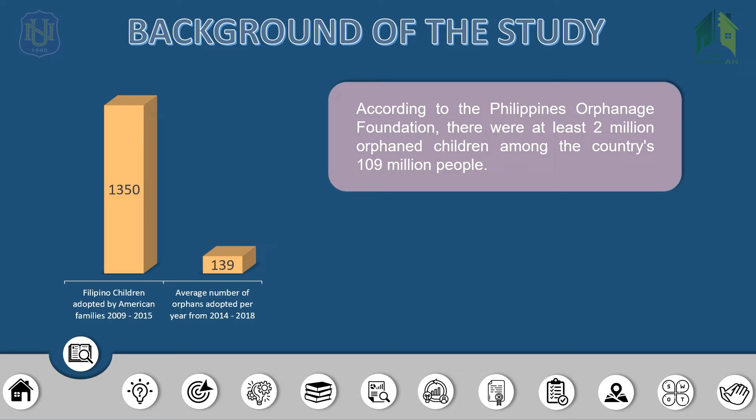To understand the orphan crisis in the Philippines, the Philippine Orphanage Foundation made 4 reasons that may be contributing to the Philippine ever-increasing orphan population. First is natural disaster. Second is teen pregnancy. Third is poverty. Fourth, lack of education, which bring us to the final factor contributing to the Philippine orphan crisis.

The Philippine Orphanage Foundation, together with DSWD, is the proponent of the project. They have allocated a budget of 2 billion and identified the site to be in Pasong Tamo, Quezon City.

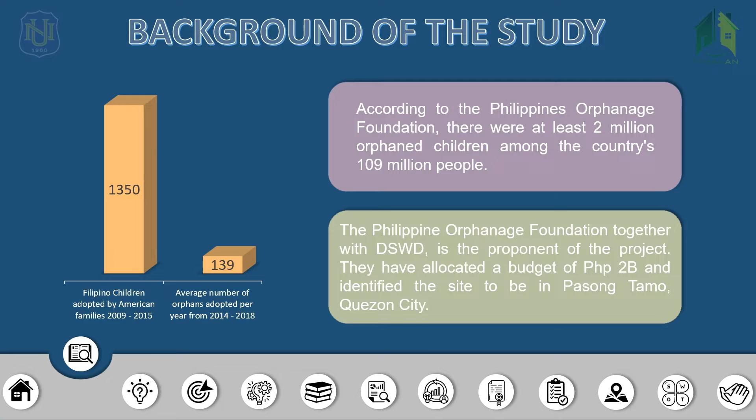Statement of the problem. The enormous rise of orphan and abandoned children is an endless crisis. They are anywhere, left broken and ignored in many places throughout the world. A lot of them will be raised without understanding the true meaning of love. They live without experiencing the embrace, leadership, and guidance of parents. They are not given the opportunity or rights to higher education, nor are they guaranteed a well-established career.

Most of them remain unwanted. The proposed orphanage is called Tahanan, which has a double meaning. Tahan means stop crying, and Tahanan means home. To put it into a sentence, it means stop crying now because you are finally home.

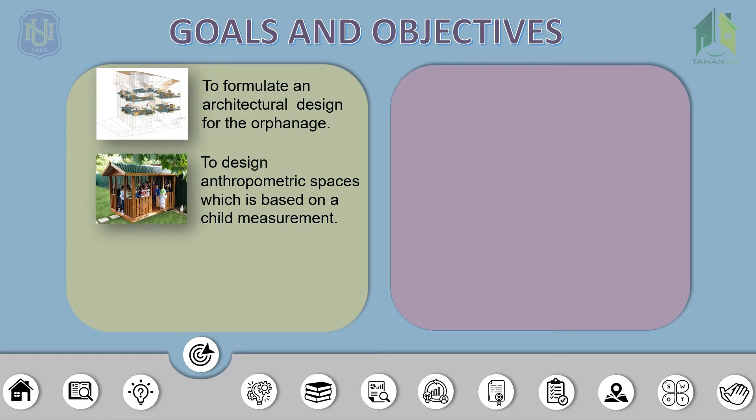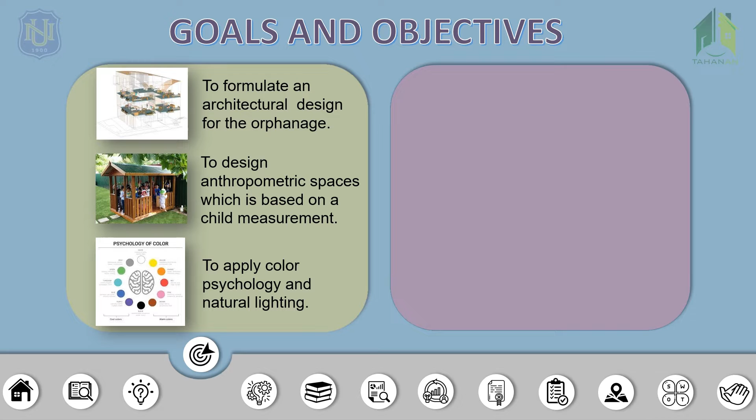Goals and objectives: To formulate an architectural design for the orphanage that can accommodate the material and psychological needs of an orphan child. To design anthropometric spaces, which is based on a child's measurement. A design that stimulates their senses and promotes their interaction with people and with the built environment.

To apply color psychology, like bright colors which radiate happiness and possibility, and using natural lighting that greatly influences the human body, both visual and non-visual.

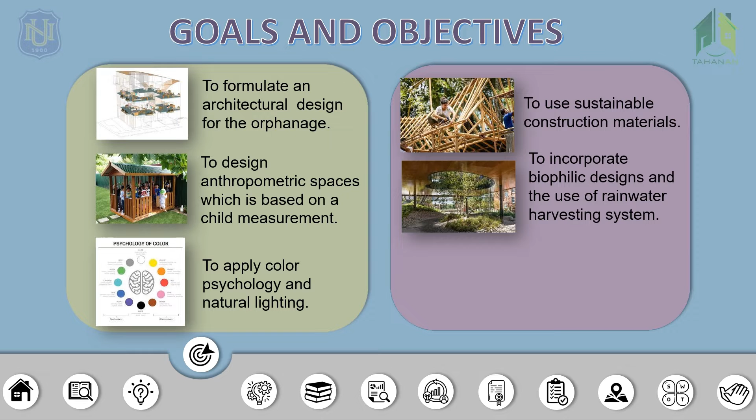To use sustainable construction materials, such as bamboo, which is a good alternative for an affordable home material, and cement eco bricks, which are built from shredded plastic garbage and wet cement, making them stronger.

To incorporate biophilic design in the built environment and the use of a rainwater harvesting system, as this approach is cost-effective, a substantial sum of money may be saved each year.

To evaluate the wind direction around and inside the houses for the optimum utilization of prevailing wind for natural ventilation.

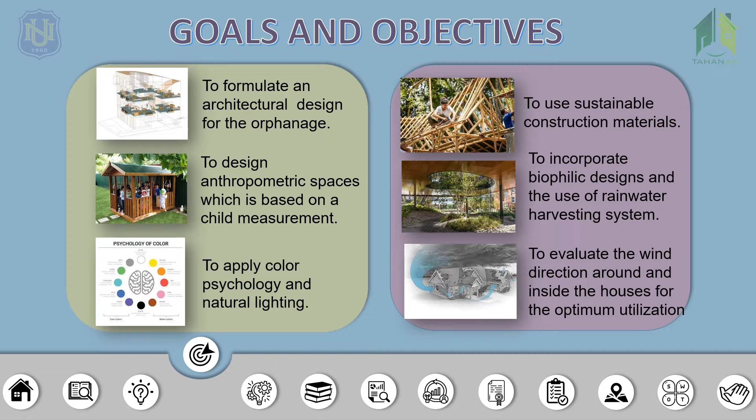Orphans come from different backgrounds, and changing environments tend to be very challenging for them to adjust to. We must take into consideration the perspective of a child and incorporate how materials and surfaces can influence their mindset, inspire feelings, and modify their way of behaving. The material utilization inside the space ought to eliminate any feeling of dread a child might be feeling after entering, and deliver an atmosphere of amicability through architecture.

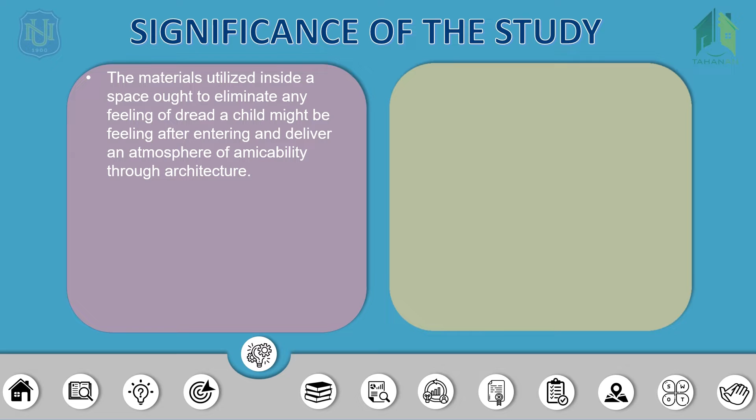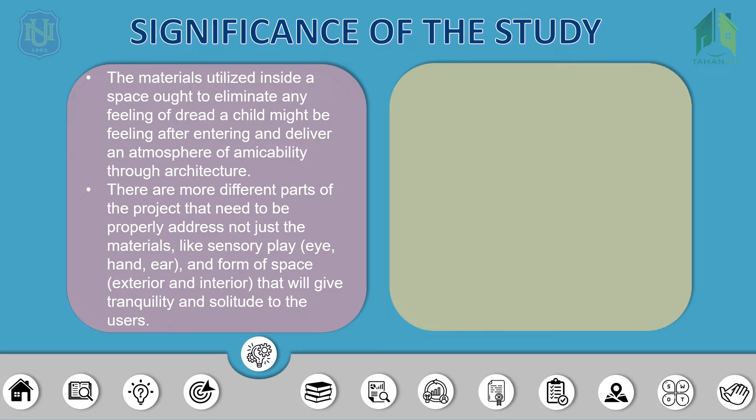The primary materials to be used are bamboo, laminated wood, and eco bricks. There are more different parts of the project that need to be properly addressed, not just the materials, like sensory play and form of space, that will give tranquility and solitude to the user.

While the arrangement of open air is fundamental, the design of a home in which a child stays should allow for a surrounding that will permit positive mental excitement. The mix of play spaces inside the home for cooperation and non-stop spaces for social communication are factors that were painstakingly thought of and executed into the plan.

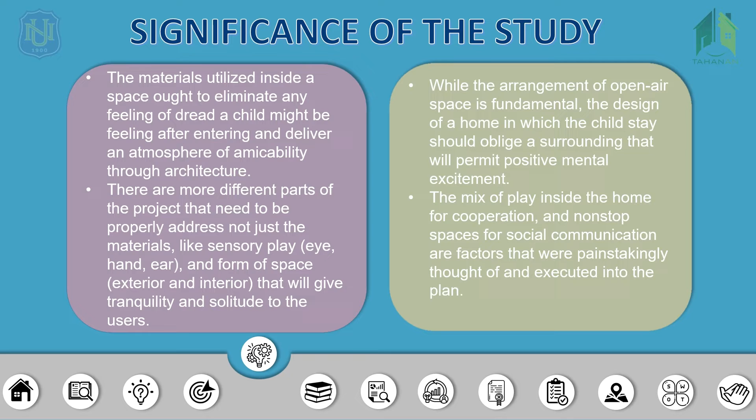Review of related literature. Article 1: Architecture Enabling Transformation of Lives in Children's Homes. This paper looked at how child-friendly design of the orphanage and its direct environment can support a smooth course of changing places and assist with incorporating these children into a new home by wiping out the sensation of estrangement.

Findings and application: Spaces that are too large can lead to noise and confusion, while spaces that are too small can create a heightened level of stress and anxiety. Incorporate cubbies and comfortable corners in our design.

Article 2: Designing Stimulating Environments to Alleviate Orphan Children's Psychological Problems. This study investigated how architectural design might help orphan children deal with psychological issues such as social isolation, despair, and fear because of losing their parents and adjusting to a new environment away from home.

Findings and application: Stimulating environment, engaging the body, encouraging playful sensory exploration, and offering a seamless relationship with the site's natural environment. Create interactive spaces within the site to activate their senses, brain, and emotion.

Article 3: Comprehensive Guide on Color Psychology for Kids.

In this article, the writer explained that to understand the basic principle of color psychology, you need to be knowledgeable on how color can affect the brain development of children. Findings and application: colors affect mood, emotion, action, and overall ambience of space. Apply bright colors in the interior for kids and pastel or matte colors for teens as these colors radiate happiness

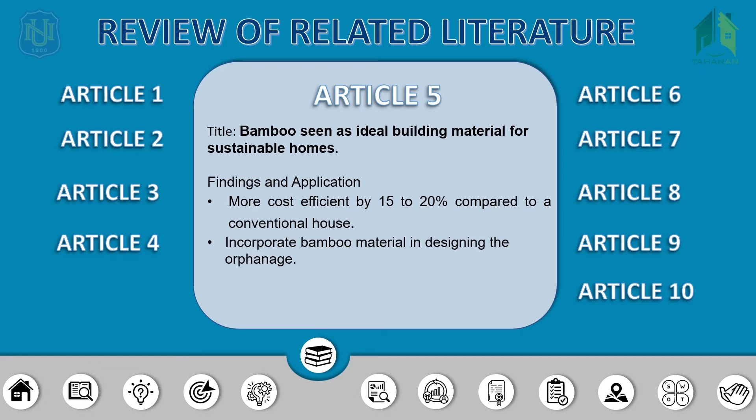Article 5: Bamboo seen as ideal building material for sustainable homes. In this article, they are trying to change the misconception of bamboo as a poor man's material, which is how Filipinos perceive it, stating that bamboo can be an alternative building technology for socialized housing. Findings and application: it is more cost efficient by 15 to 20% compared to a conventional house. So to be most cost efficient, we will incorporate bamboo materials in designing the orphanage.

Article 6: These eco bricks are 4 times stronger than your regular hollow blocks. This article discusses a solution to the large number of plastic waste, which has been a problem not just in the Philippines but also around the world, by making cement eco bricks, a combination of two technologies.

Findings and application: cement eco bricks are heavier, sturdier, and more compact, with PSI ranging from 670 to 770 and 870 depending on the shredded plastic incorporated in. This implies that the buildings they are used to build are 4 times stronger. We will be using cement eco bricks in constructing the walls of the orphanage.

Article 7: Sustainability of rainwater harvesting system in terms of water quality. This research was conducted in Dhaka City, which always has a shortcoming of supplied water due to an imbalance between demand and supply. They did studies of its benefits, the quality of rainwater, cost effectiveness, its water saving strategy, and the impact on energy and climate.

Findings and application: it is only cost effective as installation cost is low, and it can reduce expenses that one must pay for water bills. We will use the rainwater harvesting system in the orphanage as a sustainable option of providing water and reducing water expenses.

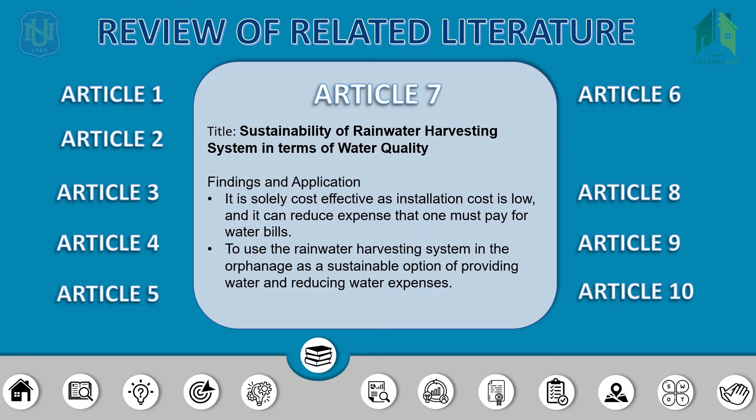Article 8: Investigation of biophilic architecture patterns and prioritizing them in design performance in order to realize sustainable development goals. In this work, it was discussed and analyzed the ideas of biophilic-based architecture, also known as biodiversity-friendly architecture, to achieve the goal of sustainable development.

Findings and application: biophilic design is an innovative method that highlights the necessities of preserving, enhancing, and restoring meaningful natural experience in the built environment. We will incorporate nature-inspired spaces or structures in the orphanage.

Article 9: CFD evaluation on a pre- and post-renovation of windows and doors opening of a typical wall-detached family house in the Philippines. According to the study, through assessment of the architectural style based on an analysis of the lot perimeter wall, house windows and doors location, and house internal division is essential in the utilization of natural ventilation depending on the direction of prevailing wind in the house surroundings.

Finding and application: the house and its surrounding access to fresh air is reduced because of the lot perimeter wall. We will design the building as far away as possible from the perimeter walls to maximize wind field and reduce the use of mechanical ventilation.

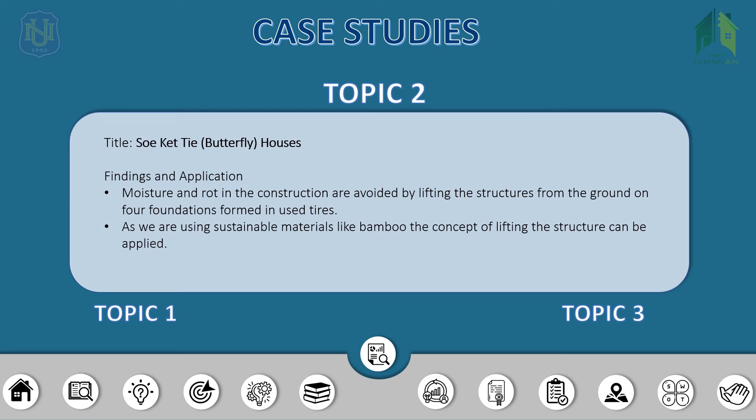Topic 3: Streetlight Tagpuro, a study center and orphanage in the Philippines, by Eriksson Furunes Architecture and Leandro V.

Locsin Partners and Bois spearheaded a collaborative community effort to plan and build a storm-resistant, post-disaster building for Streetlight.

Findings and application: to be resistant to typhoons, the structure has open voids and uses diamond-shaped light timber slatted frames inserted between concrete volumes to allow powerful winds to flow through.

In order to be typhoon-resistant, adoption of this concept to the structure of the orphanage can be applied.

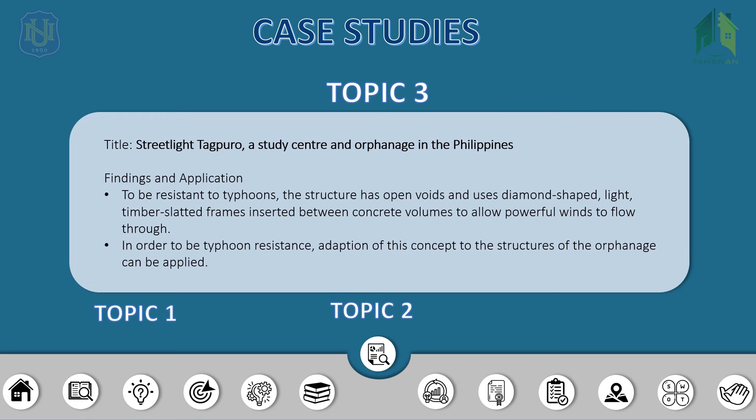Research focus and methodology: this project will focus on architectural design—the form, size, texture, and color of the interior and exterior design—in order to exude a friendly and home-like atmosphere, as well as the behavior of the users, from staff, adopters, volunteers, and especially the children, that will promote interaction to build their social skills.

Construction method: designing buildings that are not too massive, like 1 to 2 story homes, so the children won't be overwhelmed by the transition of changing homes; using cozy, home-like materials such as bamboo, wood, and bricks; and applying psychological colors for the interior to spark their creativity.

For the research methodology, there will be an interview with an architect to know the fundamental requirements, spaces, and considerations in designing an orphanage, and its criteria in locating a suitable site.

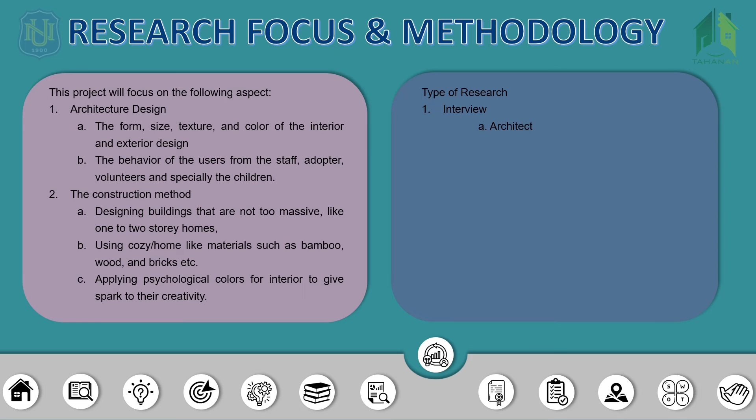An interview with an orphanage director to know the terms and process for adopting children and how children react when being brought to the orphanage; and with an orphanage caretaker to know the condition of the children and their daily routine, and how they handle children of different ages and genders.

An interview with a child from the orphanage to know the children's point of view inside the orphanage, how they interact with each other, and their psychological conditions, especially being confined in an orphanage.

A survey of the orphans to know other information like age, gender, and when they were brought to the orphanage.

Observation of an orphanage to know how children behave and how caretakers interact with the children.

Lastly, journals and books from the City Development Planning of Quezon City to know the classification and correct zoning in choosing the site, and the Philippine Orphanage Foundation to know the orphan crisis in the Philippines.

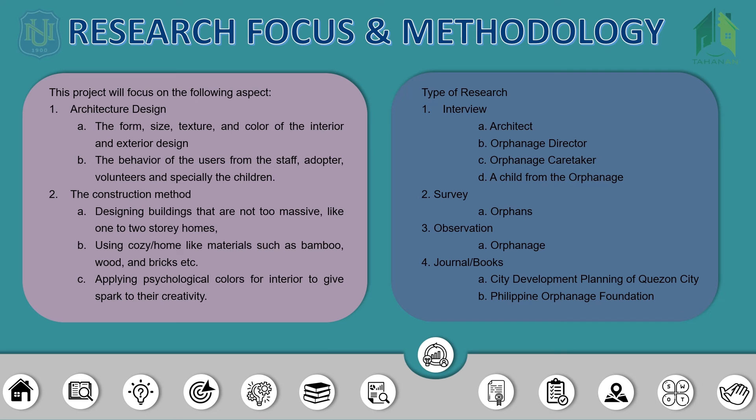The project is under Group D Institutional, and these are the zoning classifications. Since the site is under R2 Residential, this is the R2 zoning classification.

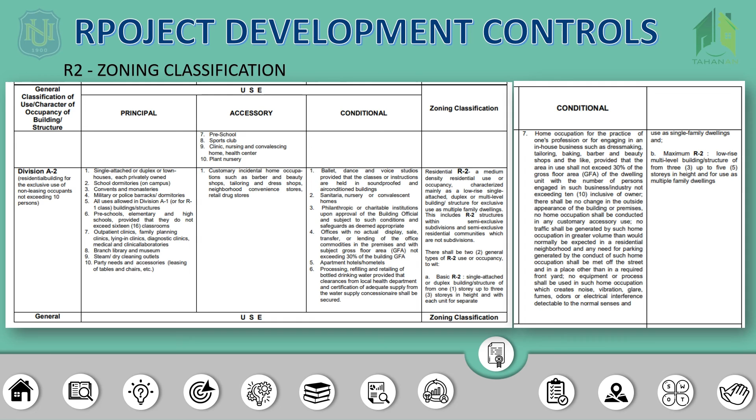Building height limit and setbacks, minimum percentage of open space by occupancy, and reference table for PSO, ISA, and USA.

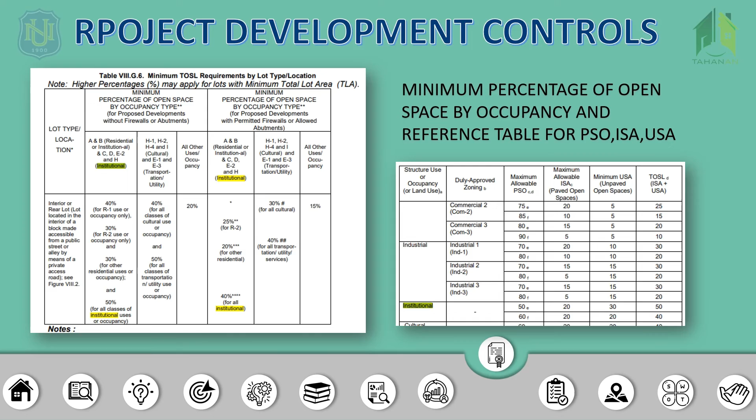Site justification: the proponent gave this site because it has all the criteria needed. In terms of land area, the site is large enough to handle 100 or more residents and to have enough space for recreational activity. It is accessible to Bonifacio Drive, a 4-lane road.

It is under the R2 medium density residential zone and its actual land use is still vacant. Existing utilities and services are available within the site, and in terms of safety and security, the area is safe enough for the users and for the development.

The site is free of potential damage or injury from natural hazards, is relatively flat and can hold all possible uses, and if the orphanage provides higher education, there are a lot of nearby schools around the site.

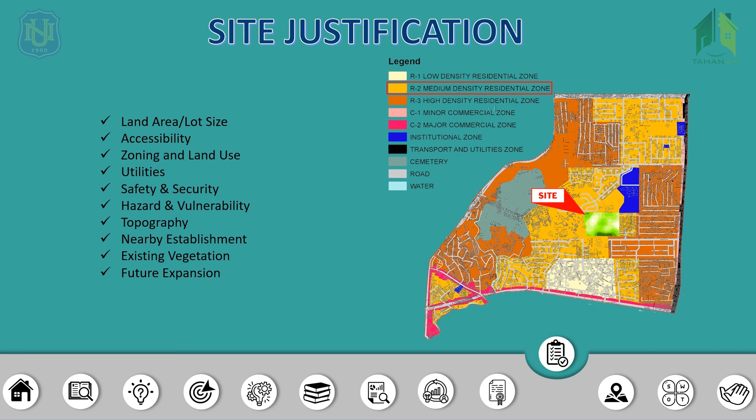There is also a lot of existing vegetation inside the site, and lastly, the site is large enough for future expansion.

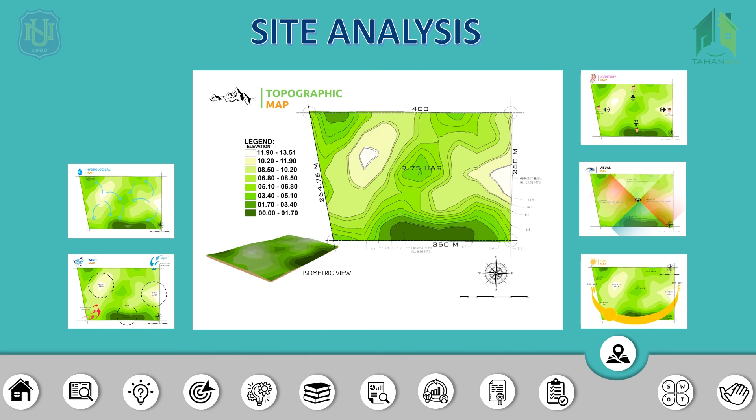Microsite analysis: first is the topographic map. The lowest area is the darkest color, and the highest area is the brightest color.

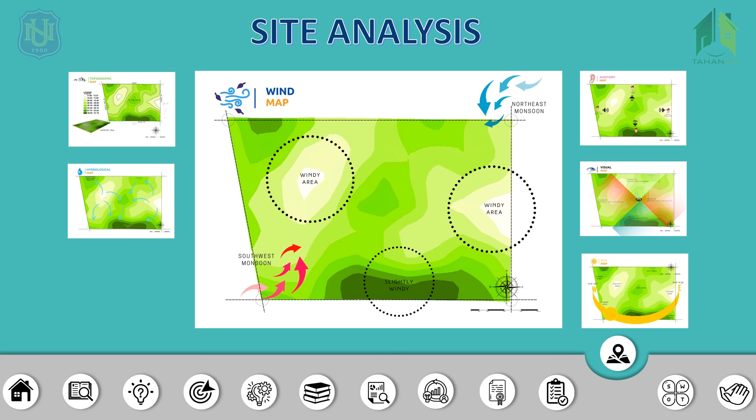Hydrological map showing the prominent location of the catchment area, and wind map showing the natural flow of air inside the development.

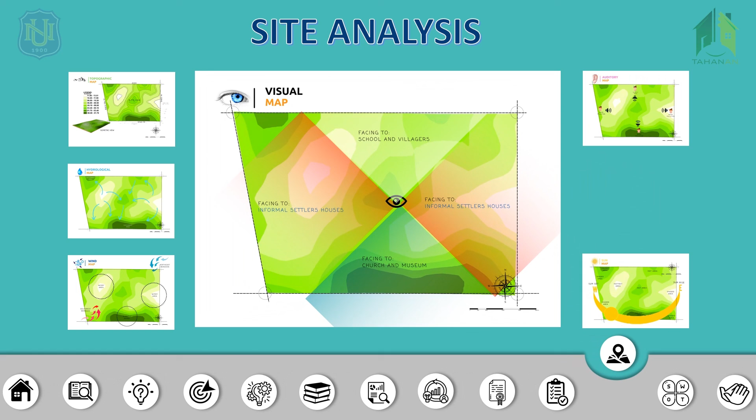Auditory map showing the source of noise pollution that could affect the design process, visual map showing where to orient views to maximize the beauty of the built environment, and the sun map showing the direction of the sun.

SWOT analysis. Strength: electrical, water, and communication lines, as well as drainage and sewer lines, are available. The site has a non-arid climate and is a rolling or sloping terrain which allows easy movement of water, resulting in absence of danger of flooding.

The site is located in a more private area away from the busy street.

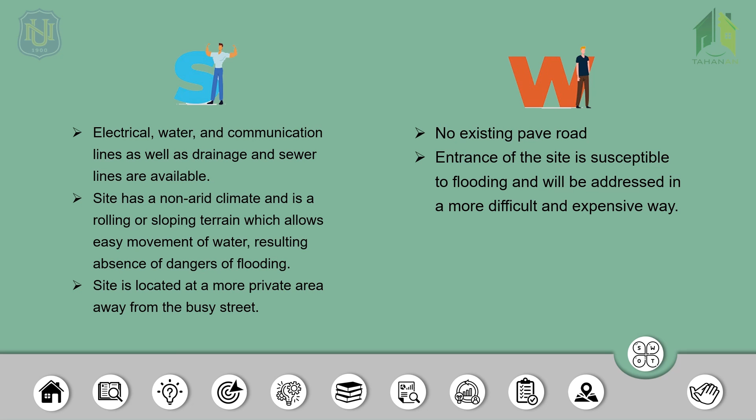Weakness: no existing paved road. The entrance of the site is susceptible to flooding and will be addressed in a more difficult and expensive way.

Opportunity: the site is large enough to be able to design freely, future expansion is possible, and there is existing vegetation that can be incorporated in the design.

Threat: low susceptibility for flooding, and noise pollution from surrounding informal settlers making it noisy.

Strategy: create a road connecting the site to Bonifacio Drive, surround the site with buffers, specifically trees, and create a bridge to add character to the entrance while avoiding the flooded area.